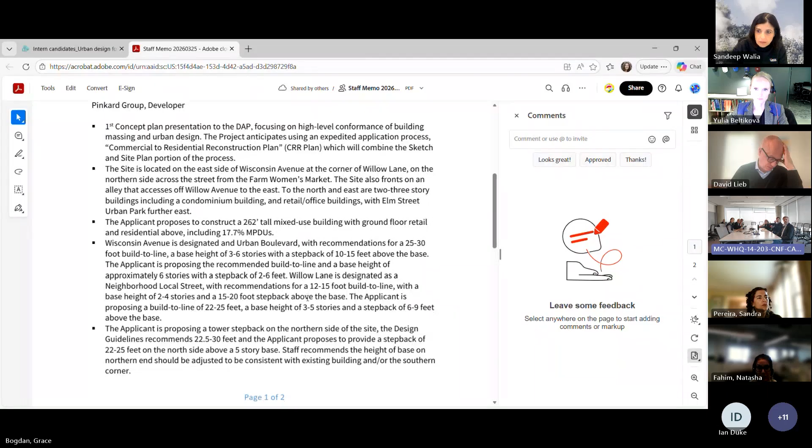And then the second page is really where we're getting into some comments. The massing concentrates its building height towards Wisconsin Avenue, with the tower in the middle, and then transitions down to Elm Street Urban Park. We do appreciate the breakdown of scale, but the proposed articulation seems a bit more rigid, and maybe softening that would be helpful. Then in the third bullet point, the large projecting set of balconies towards the southwestern corner is heavy. It creates an interesting corner treatment, but it sort of looms this primary mass over the smaller scale Farm Women's Market.

The fourth one is really getting into the base and how it could better express itself towards the relationship to the Farm Women's Market. There was a precedent photo in the upper right hand of page A-28 that we thought was really representative of what the project was trying to achieve and could be helpful to relook at. And then there's a general comment about the proposed vehicular and loading access off Willow Lane. I think this is similar to a comment you're likely going to have, if not already received in the DRC comments, about reworking the access off of the rear alley.

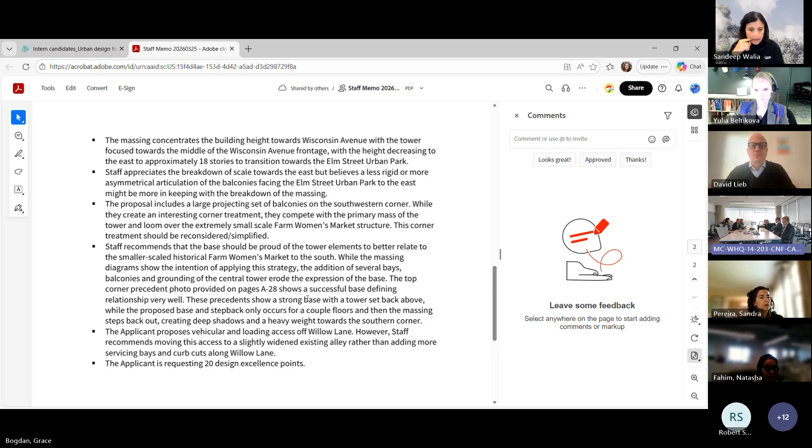Sorry for not having this. No, that's okay, we should. Okay, well, should we just jump in then? Yeah, okay, yeah, all right, Yavuz, can you share your screen?

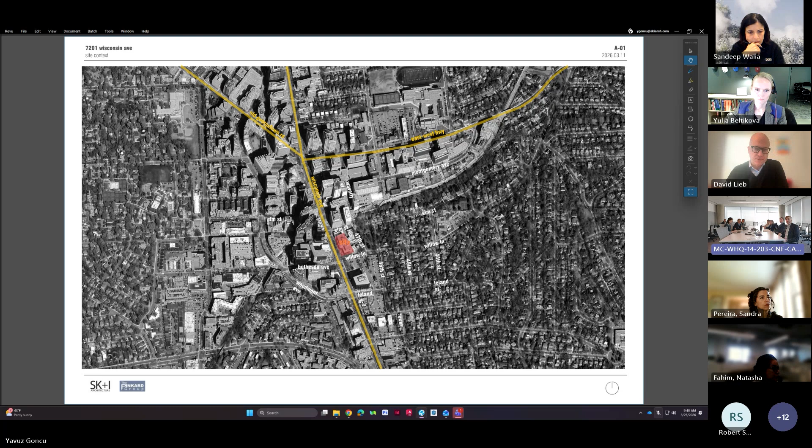Next page, so we're located at 7201 Wisconsin. Hi everybody, Chris Hopper, SK+I. Good to see you again. Joined online by Sami Kirkdill and Yavuz Goncu, who are also working on this project. The site is on Wisconsin between Elm Street and Willow Street. It fronts only on Willow and Wisconsin. So basically it's at that intersection where Bethesda Avenue kind of curls around, intersects with Wisconsin Avenue, and then Willow continues one way into the neighborhoods to the east. Next.

Current images of the site. So our site doesn't take up the whole block. It does stop right here at the existing bank building. So it's basically the entire pinkish red office building at the corner where the Panera is.

Can you go back one? Yeah, for a second. On the bottom right, you can kind of see the existing garage entrance and the existing alley access point there. That was our major comment for our DRC yesterday, where we discussed the site access there. I'll get into that a little bit shortly. Next page.

Willow is considered a neighborhood local street. Wisconsin, an urban boulevard. According to the guidelines, the site is also cited for as a retail node as well. So you can see we're currently proposing retail at the corner and potentially some more flex retail up the middle of the site. That's kind of TBD based on market conditions. Next slide.

The site is zoned CR5, C5, R4.75, 250 feet. We are going through the CRR program. We are going to provide 17.7% MPDU, so we can take advantage of the additional height allowed per that designation. So the overall max height for the site will be 262 feet.

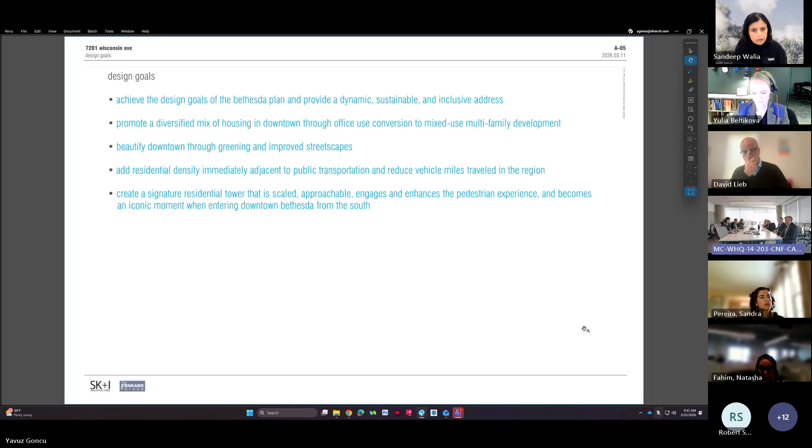Next. As I mentioned, Wisconsin is an urban boulevard. Its recommendations for a build-to line are 25 to 30 feet, with a setback between the 3rd and 6th floor. As you can see here, we are bringing up portions of the ground floor to the recommended build-to line and setting back other areas a little bit farther to address some of our public open space requirements.

This gives us an overall build-to line for the building between 25 and roughly 30 feet. This allows us to create that large planting zone adjacent to the street, but also an extra wide pedestrian through zone, and then provide an ample frontage zone that varies up and down the block here. Next.

Willow Lane, a neighborhood local street, has recommended build-to lines between 12 and 15 feet, with a setback between 2 and 4 stories. I think this is where staff has probably most of his comments, but we can talk through our thought process on the massing and setback.

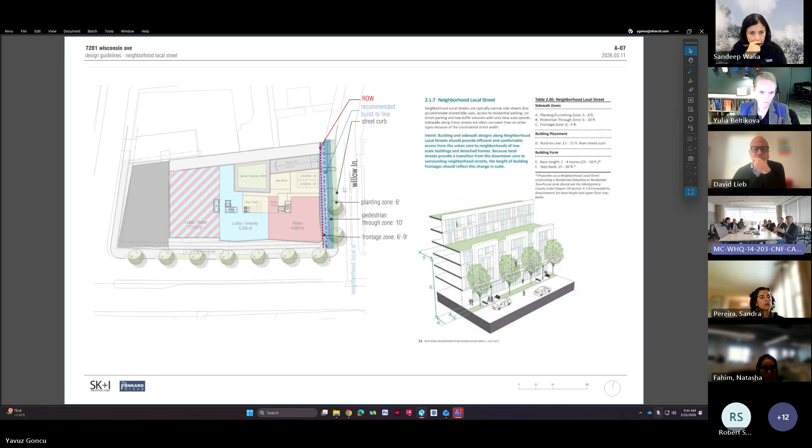Go back one page. Because Willow Lane's right-of-way is actually wider than where the current property line is, also deeper than the recommended build-to line, you can see as we go through we end up being set back almost between 22 and 25 feet because of where the right-of-way is, which exceeds the recommendation of the local street build-to line.

But what this does is help us achieve a couple things. One, Willow Street is also designated as a canopy corridor. While we are trying to reuse the garage and the existing office building, the foundation walls which extend basically to our property line, setting the building back and having a larger frontage zone and extra wide pedestrian through zone allows us to hit a couple of those goals of the canopy corridor by providing ample sidewalk width, and helps reduce the massing adjacent to the street by setting the building back farther than what is recommended.

We're further studying where the existing garage is to see if there's the possibility of trees, but we're not relying on having enough depth in the structure to do that. We are proposing additional planting in that frontage zone to create a double layer of greenery along this area.

Are you proposing street trees on Willow or not? There will be street trees, but there wouldn't be a second row of trees. Yeah, so it's a canopy corridor, and wherever possible, we try to do it.

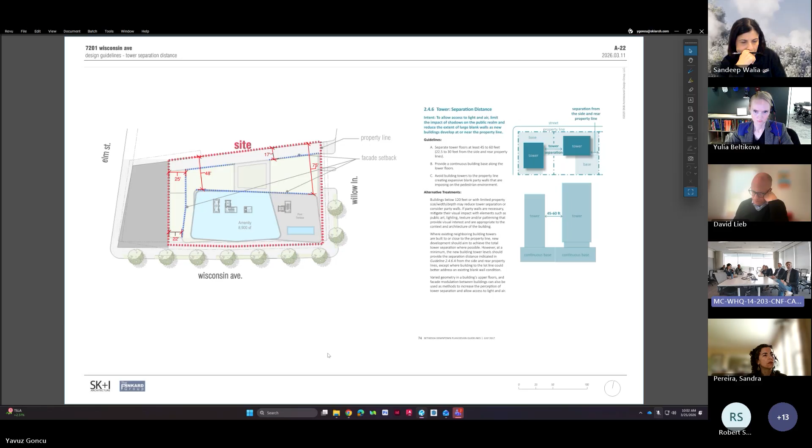Our goal with the step backs was to create a series of setbacks that are cohesive but create integrated, interesting architecture that's not just a simple wedding cake step back. Between the recommended build-to lines, all the buildings set back from those points, creating a natural step back at the ground floor that extends through the building, with overhangs and articulation. On both Willow and Wisconsin, there are multiple setbacks creating the base, the top, and the depth and articulation that lessens the bulk of the building.

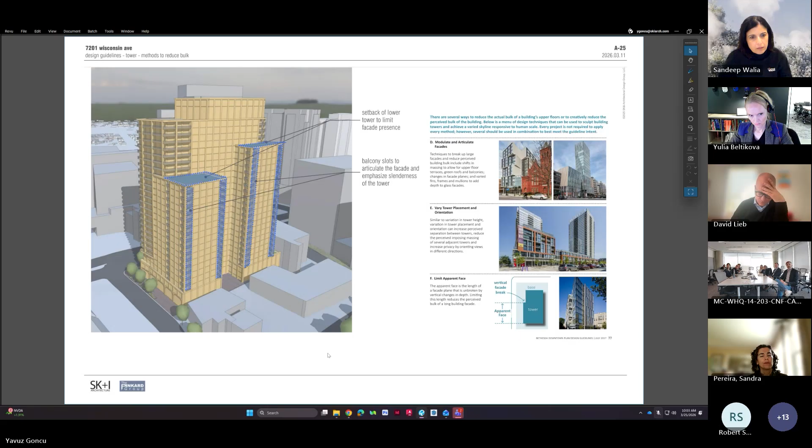As I mentioned, our goal was to move the full express height from the corner to the mid block. We're looking at integrating penthouse mechanical screening into that height to finish off and give that top proportion to the building, but also help skinny up the overall massing of the building.

I had a question about this view - Chris, could you roughly locate where the actual Farm Women's Market building is, since it's not on the street? It's quite a ways back. It's right here - there's actually space at that corner, not a building. I think that's important to point out. I believe the Women's Market is about 60 to 80 feet set back from there.

And not just on Willow, but on Wisconsin too, it's set back there as well. So I think that's helpful to point out for the DAP - that it's not holding the corner, so to speak. It's set back, and we're setting back farther than recommended, so I don't think we're towering over the existing structure. There's ample distance between the two, plus it's on our southern side, so we won't be casting shadows on it.

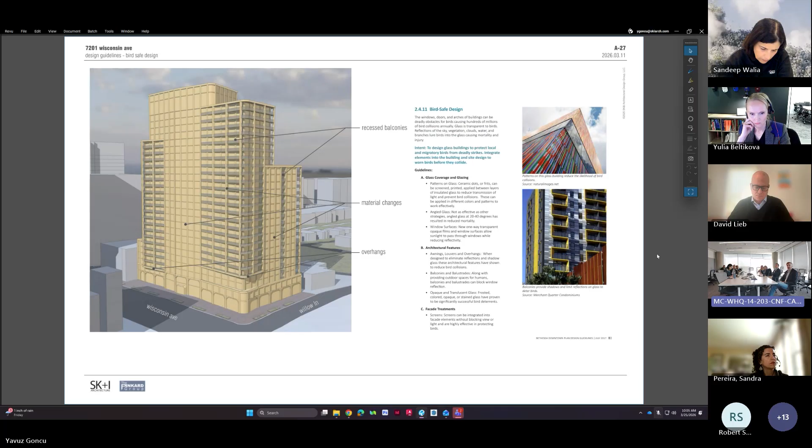We're obviously cognizant of all the bird-safe design elements we'll need to provide. A lot of the depth and articulation with the balconies, overhangs, and setbacks will create opportunities for shadows and material changes that help create that distortion on the building.

And the balconies, maybe. Yeah, and some balcony.

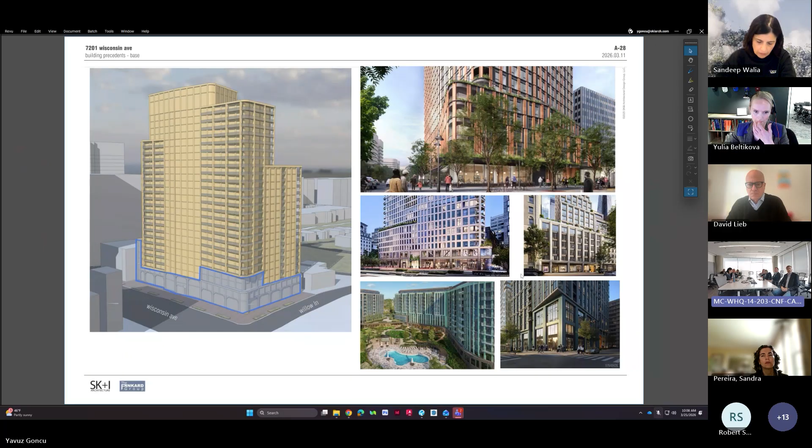And again, looking at simple ways where the massing and the moves create the visual interest of the balconies and the corner elements here, just by recessing, extending, but using that same language that's drawn through the building.

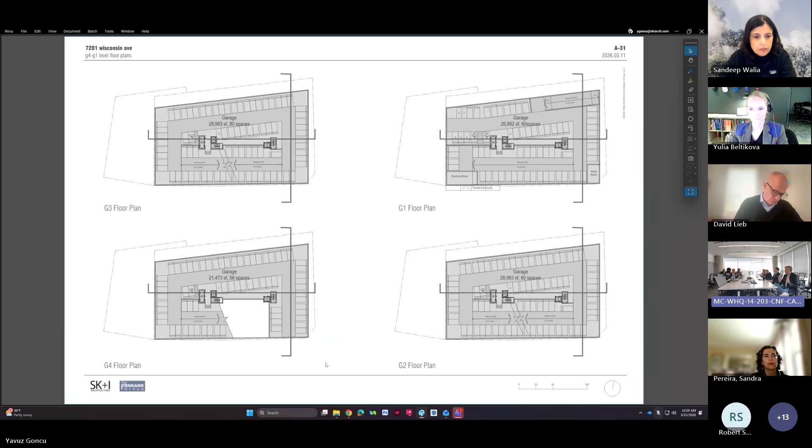I do want to do a quick time check, so you guys- I was gonna say, we don't need to look at the parking. We have the plans if there's any questions on the plans and setbacks and sections, but let's finish this up and open it up to questions and comments. Yeah, that's it. That's it. I have- can you go back to the massing diagram? Okay. Pages? Yep.

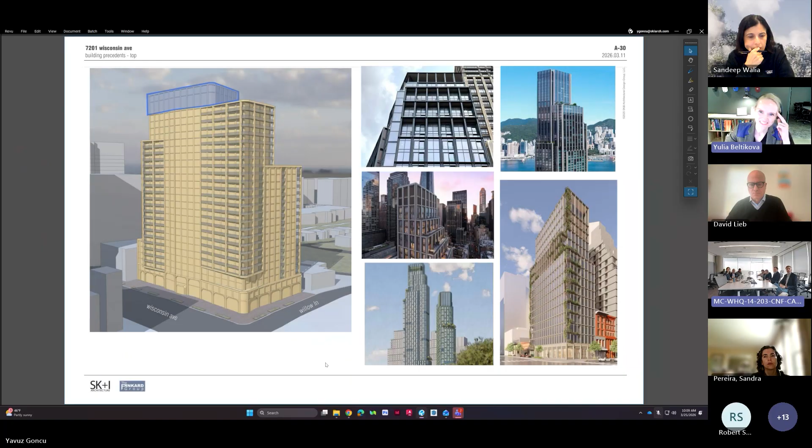Well, so I'll jump on. I think the general gist of pushing the density to the north is the right move. The thing that I'm missing, massing wise, is that I think the back is more successful than the front. One of the reasons for that is that everything's just so tight on the front. And I understand the challenges of density and all of that. I'm wondering if there's a way to either, I would personally be up for pushing the tall volume all the way to the north. I'm not sure you need the north setback.

Could you go to a view from the north, please? What's your colleague's name, Chris? Yavuz? Yavuz, here, yeah. Do you have any street views from the north? There, there. Is that it? Okay, yeah. Yeah, I'm just, it's the south.

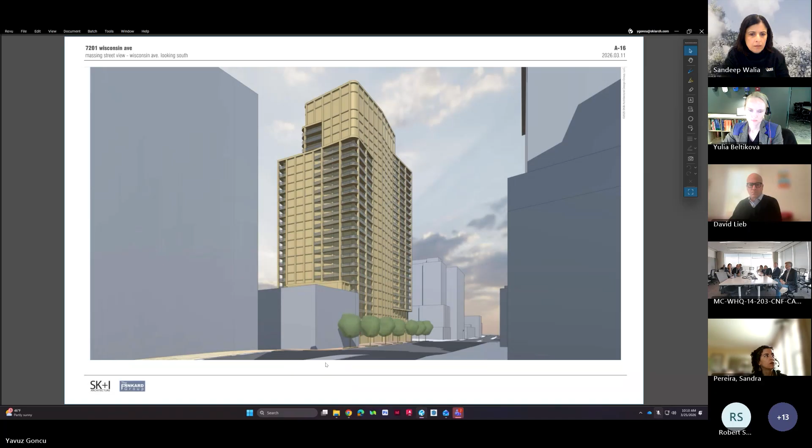I want to keep the tallest form off the street a little bit more and highlight the shoulders more strongly. Especially from the south, this is fine. I think it's the central massing and the lack of any depth between the shouldering and the main volume that's kind of my biggest issue with the massing to the south, to the farmer's market - either getting bigger step backs between the south shoulder or eliminating the south shoulder and bringing the lower shoulder around to the front.

If you go back to the south view - yeah, you sort of want the lower volume to be the corner, not the middle volume, if you know what I mean. This wants to be the defining volume from the south, if possible. And I'd even be willing to push that further north and have that be the defining element. That's kind of my first reaction to it.

Massing wise, see what the other DAP members think. Everything is just a little bit too flat along the street in terms of setbacks for me. But the approach of pushing the density to the north, keeping it a little bit more off the street if you can, that seems good.

I think I was worried about the neighborhood perspective, but I think that's actually working pretty well. I think it's the cantilevering of that volume, the floating of it, and the need to have the lower volume hold the corner versus the middle volume. I'll call it middle - I know there's like 1, 2, 3, 4, 5 volumes - but the one that either has to come down, or the south one would want to come across. Gotcha. It's my first reaction to it.

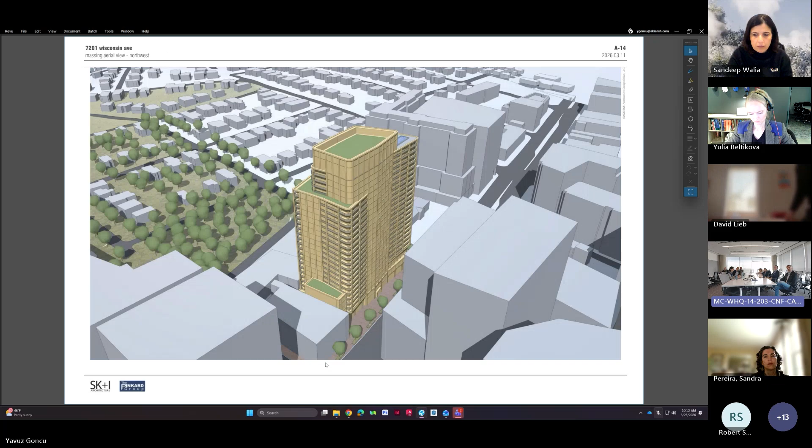Those two are quite equal in weight. The main volume and the southwest volume are kind of fighting with each other, personally. Either a greater setback between them along the street, or push the central mass inward more. I'm just thinking the southwest volume is kind of too tall for the corner.

So you're saying this volume here? And I would push this volume. I'd be up for pushing it all the way to the north, and letting this guy hold the corner.

Possible. If you can get more of a distinction between these, either a break or a fold or a reveal, that would also help in breaking up the mass along Wisconsin.

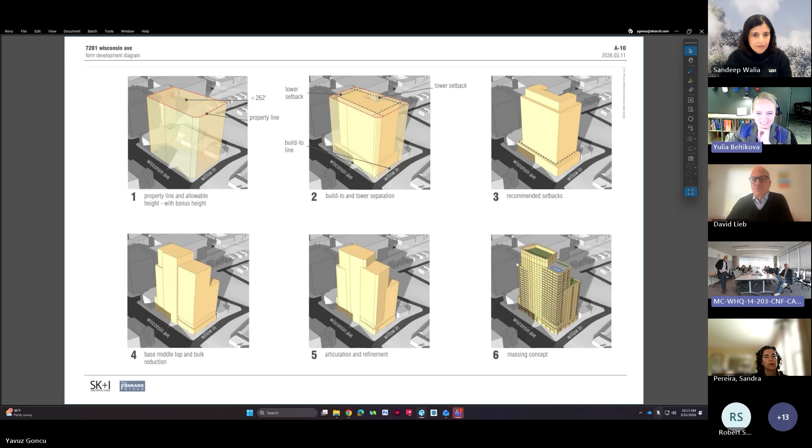We're just looking at the relationship of the different volumes that they're proposing. I think the general approach is the right instinct, basically pushing the mass to the north. That's the right move because it allows you to step to the south. And so now, for me, it's just the defining of the southwest corner.

There's the central volume and the first shoulder, let's call the tall one A and the next one B. A and B are kind of fighting each other and nobody's winning. So either volume C, the south volume, could come around and hold the corner, and this gets pushed in, or you push that back to get more distinction between those two. That's my first reaction. Yes, I agree with Robert's reaction.

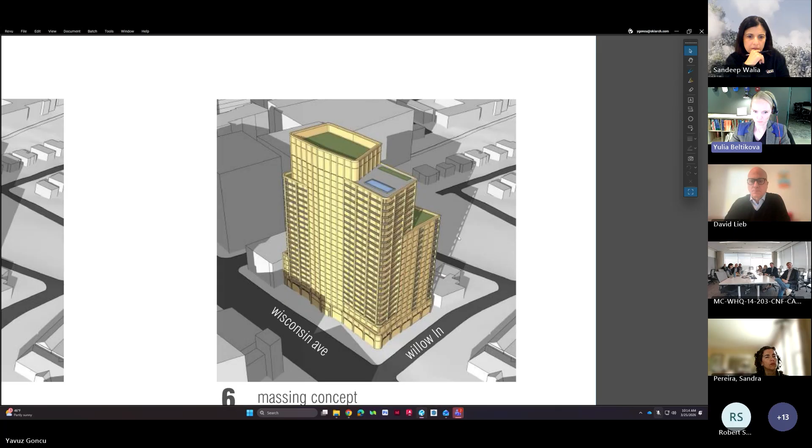I do not see right now in the proposed massings the distinct base, middle, and top. Perhaps it's the rendering. I can see it a little better on page A15, the street view at the corner of Willow and Wisconsin. I can see, because of the overhang, the 2-story base, or the first story base plus the recess.

I would also suggest, in your precedent images, some of the facades are ganged up between 2 or 3-story volumes, which you're not showing right now, but those precedent images are quite useful and will be useful when you further detail the building. When you combine 2 or 3 stories into one window or frame, it makes it less of a giant building looming over, at least visually.

I do believe you need a bit of a setback from Willow Lane. When you pointed it out in dimensions, I think you said that volume closest to the alley is about 9 feet setback, right? So at the farthest, at the north end, on the right side of this image, the part that goes almost 17 stories, that is effectively 9 feet setback from the recommended build-to line.

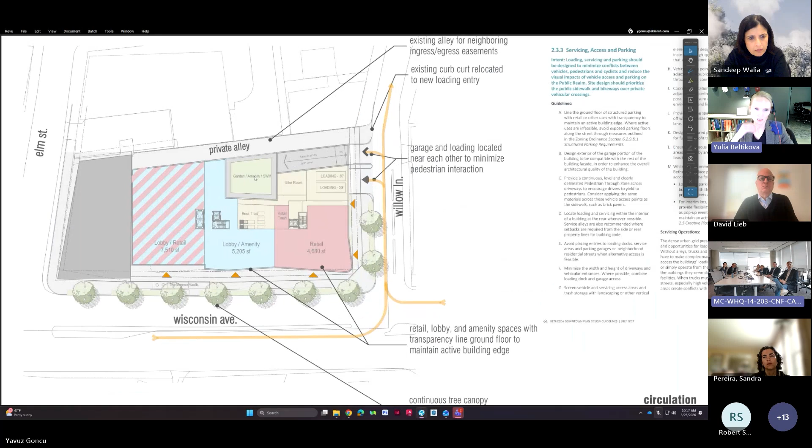That would be a private area that would either work with and capture a lot of our stormwater management requirements at ground level, but also maybe an area accessed off the amenity space as an outdoor garden area. The alley could probably have a private screen between the alley and this space to make it feel more welcome, but with the opportunity now of moving loading back here and needing to look at the structure with the garage, that may just disappear or get shifted.

I mean, in terms of the massing, that size is what's extruded with the fingers in the massing. So I actually like this idea.

Because there's an alley, I wonder if there's an opportunity to do something to the alley and make that park semi-private. There are areas in Bethesda closer to the metro where you're walking through neighborhoods and there are semi-private parks that you can walk into, sit on a bench, and they don't completely get closed off with gates, but there is an indication that this is not completely open to the public, yet very inviting, calm resting spaces with trees and plants and benches.

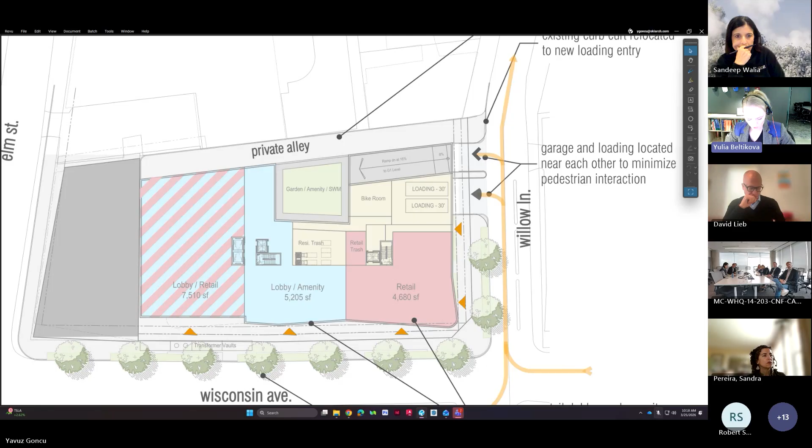Going back to the setback, because you're using the existing garage structure, I'm realizing the further you set back this face on Willow Lane of the building up above, that load needs to carry through to the existing garage. So you also have a limitation on how far back you can practically set it back, because otherwise you're losing a lot of existing garage spaces.

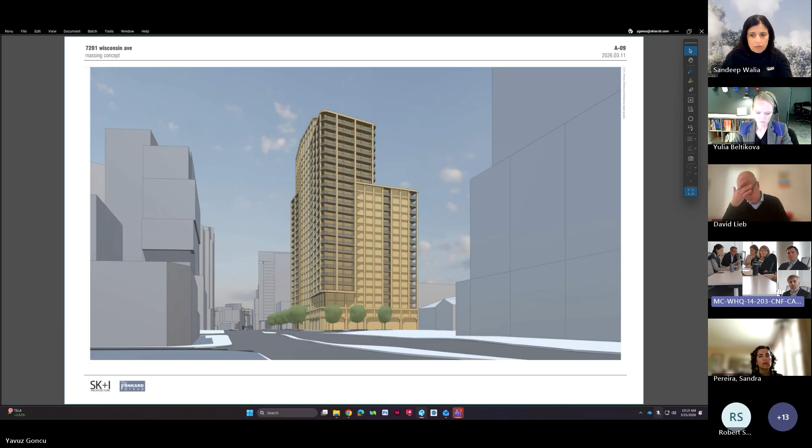And probably it's going to be in the drive aisle at that point. That's partially why, as I mentioned earlier, we're getting scans of where those walls are this week to confirm everything, but we have some old drawings we've been referencing. And yes, to your point, where those setbacks are, they're catching columns right before the drive aisle. I think we have a little bit of wiggle room to massage where that setback is, but there are structural limitations, like you said, to what makes sense to build with those setbacks.

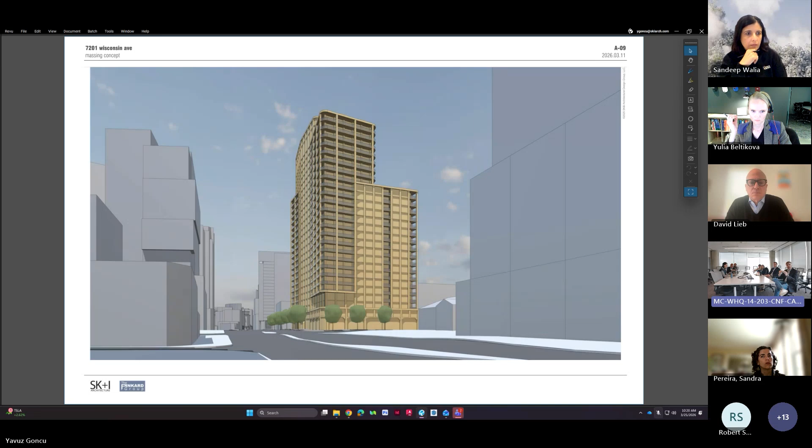So maybe there's a way to further articulate that two-story base in this view a little more, to give a larger apparent setback from where the actual tower is, and that would help. I think the tower itself is mathematically in the right spot for the recommendations, and probably structurally with the garage. So if we can express the base in a deeper manner, maybe pull it out a little farther, since we're pulling it back as you go on Willow Lane, maybe it stays a little closer to the street edge instead of pulling back. It'll help create a larger apparent setback there.

The building overall is large, but the building across the street is quite large as well — a lot of new high-rise buildings coming online along the Wisconsin corridor. And there is some breathing room, that little park on the corner, 7200 Wisconsin, right across the street — the Starbucks park that is quite successful — that's not going away. It's public use space for 7200, so you're correct, it's not going away.

So you're saying there's a big development that's not shown here, happening catty-corner? How tall is it? 250. You should show it. We can show it — you worked on it, so I can. It just, in terms of our views here, it kind of gets in the way of some of those aerials, so we just hid it. But that's the point, it helps you. Yeah, I think it helps you. We can throw that in there.

I don't know how this works — we can make comments about pure design, and then there is reality. There's the practicality of constructing something, which we've already discussed, the existing garage structure, but there's also pro forma to make something feasible in these very difficult economic conditions. I don't know how many units you would lose — will it render the project infeasible if you're setting back another, say, 5 feet and losing the depth of units, and therefore the overall number of units is less?

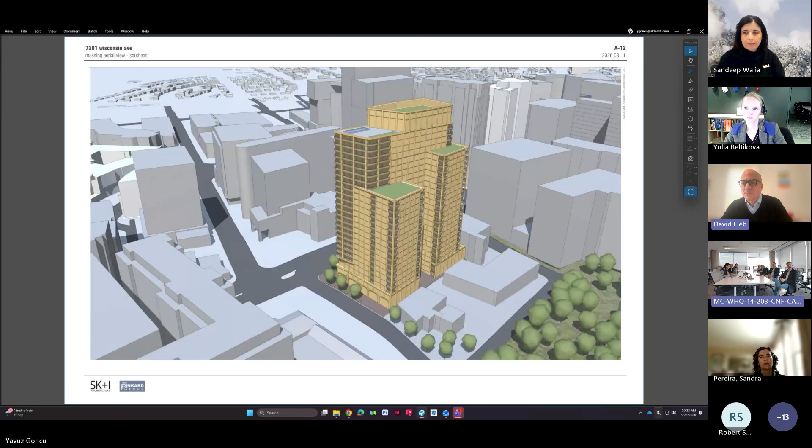Why don't we let others offer their ideas? David, do you want to offer your opinions? I do, but Sandeep just raised her hand, so why don't I let her go first? It's okay, David, go ahead. I just wanted to make sure there was some time for me to speak.

Oh sure, thanks so much. And I have to jump off at 10:30, so I appreciate you letting me jump in here. I thought I strongly agreed with a lot of the comments in the staff report and Rob's comments also.

When I looked at this, I had a sense that there was insufficient variation in the facade, or there's some undulation to it, these hinges that you describe, but they're almost too subtle to read in a lot of ways.

And I was wondering, could you go to slide A18 please? Yeah. So there are a couple of things about this that I wanted to note.

You made reference in your presentation to there being a simple treatment of the facade, by which I hope you mean there will not be a great deal of material variation, that consistent with some of the images you showed, there will be a consistent facade treatment. One thing I would very much not like to see is that middle tower volume being sort of one of those glass eruptions between a couple of different building forms that seems common, and kind of leads to a very incohesive looking building.

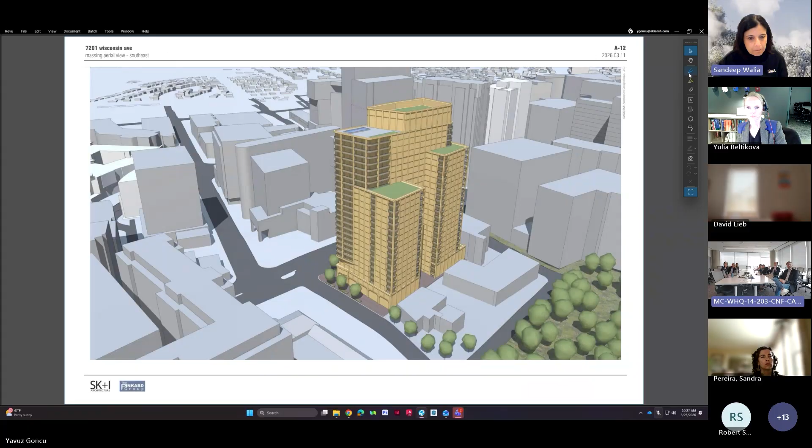Quick question before I say anything—just to confirm, I think I tried to make sure I understand, but the Starbucks Park, since we called it that, is that staying or is that going to be changing? Yes, that's staying. I think you're referring to the old Starbucks that was across the street, where the Jose is. There's a building missing on the southwest corner of the slide, but the open space is staying, right? It's staying, the recently revamped open space is staying. Yeah, that area is staying.

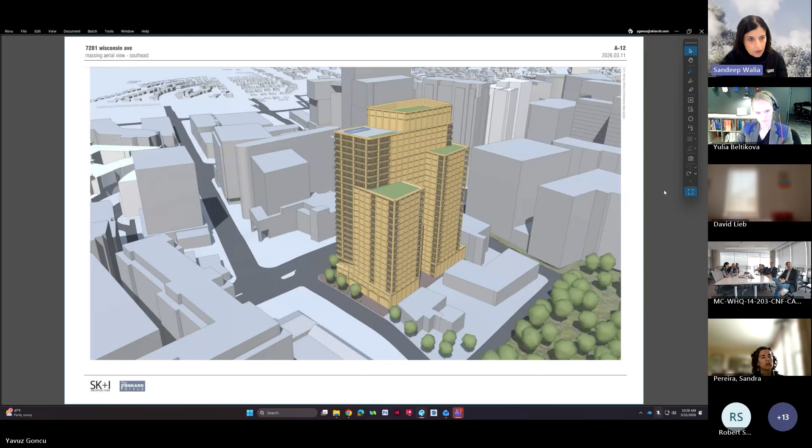All right, so I agree with everything mentioned in the staff report and what my colleagues just mentioned. Just adding a little overlay of landscape related comments here. As I look at the existing conditions, what I see we kind of missed is there is a major corner treatment at the intersection of Wisconsin and Willow Lane. So that is something that isn't there anymore.

And when I look at the overall connectivity of the site with the existing space that's across the street on Wisconsin, that existing corner that is there right now seems to have a really good seating area, some art element as well.

And then there's dedicated bike lanes over there as well, which take you back to the park. So there is sort of this environment of pedestrian connectivity and the idea of coming to a space with some sort of art element.

I really liked Yulia's comment about the garden that is proposed around the alley, and if that space at the corner is going away, I appreciate all the additional setback that's been provided. Obviously we'd like to see what the landscape architect envisions those spaces to be, but how are we going to compensate for that loss of the corner and what the community is used to utilizing that corner for? So there seems to be a potential to integrate the garden space by the alley, and perhaps look at the treatment of the entire alley, understanding the loading and unloading requirements, timing, what time the main usage is going to be.

Is there an aspect of connectivity between the corner, the alley, and what happens at that amenity space? And then further how it extends itself to the park. So what I'm looking to see is if you zoom out a little bit, how does all of that fabric work, what's your team's attitude to it? And how does the design start to represent that attitude on the ground plane?

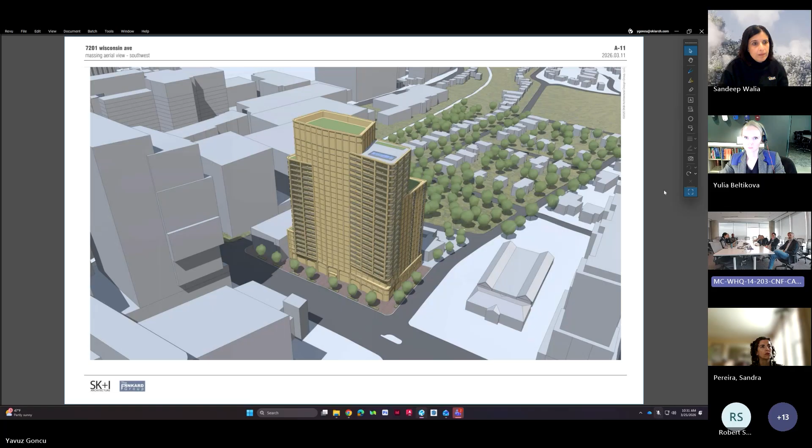That's all. Say about the alley, the property owners that have access to it are located to the east. They use it very much for operational purposes, so it's a little grim back there. And we are only controlling one side of it.

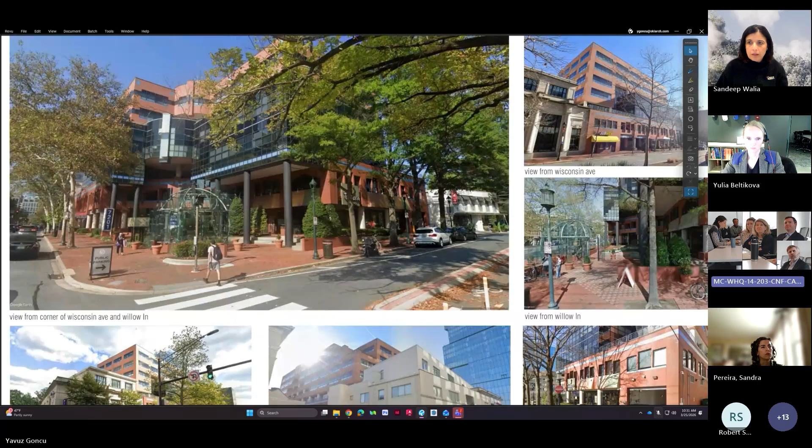If you can get that loading in the alley, it would be great, even if it was just one at a time. If you don't widen it and ruin your whole structural grid, that'd be great, you'd get a lot of points for that. I mean, I think we're committed to doing that. So we just had to make sure the garage entry still works structurally, right, with all the parking layouts.

So we just got to see, because that may need to go in as well and rotate. We haven't gone that far yet. So I think knowing exactly where those extents of the garage are - we have a good sense, but if we're going to widen this 5 feet, there's also then the ask of needing a pedestrian refuge between here, and that pushes it another 5 feet. So effectively, we'd be pushing it 10 feet almost.

I just wonder if you have to widen it - why can't you just keep it and then widen it beyond? Recommendations are the minimum is 20 feet from the DPS. Yeah, but then we have to look at the truck turning. Well, I think some of it is either put it actually on the street or accept our offer, right? So I think we could run it with the civil engineer, run some truck turning movements in here.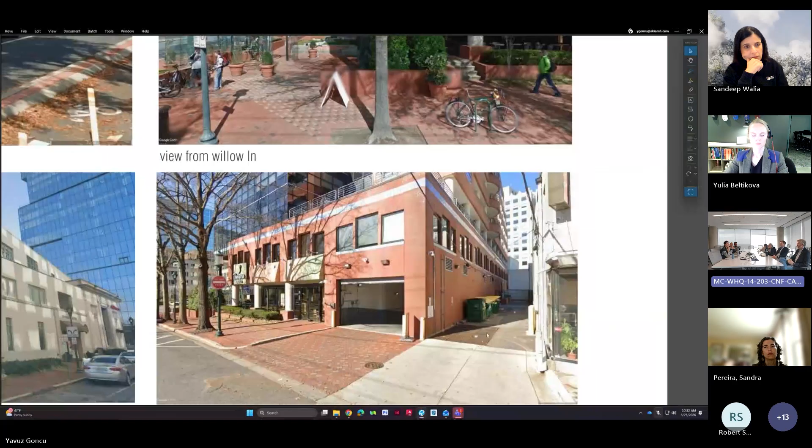I just don't know if 17 feet is going to allow us to turn in, turn out. No, you'd widen beyond a certain throat, I think. Oh, you're just saying open it up. Yeah. So I think we need to explore options and see how it works. It's just something we discussed yesterday.

I think it'll be really great if you can look at some of the points you heard, both for the landscape and the architecture, like the proposed buildings across Wisconsin and also south of the Farm Women's Market. Really look at the Farm Women's Market and its plaza as an outdoor room. There are going to be 3 new buildings that will shape that outdoor room, and maybe that gives you some cues on how the massing of this building needs to participate in that conversation.

Totally agree. I think seeing it in isolation is one thing, but once you start to see what the building to the south is doing, what's happening at that corner to the southwest, how is that building doing - it changes things.

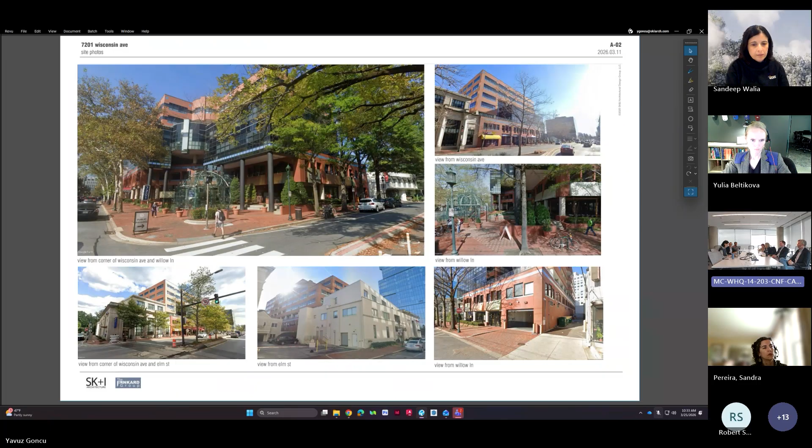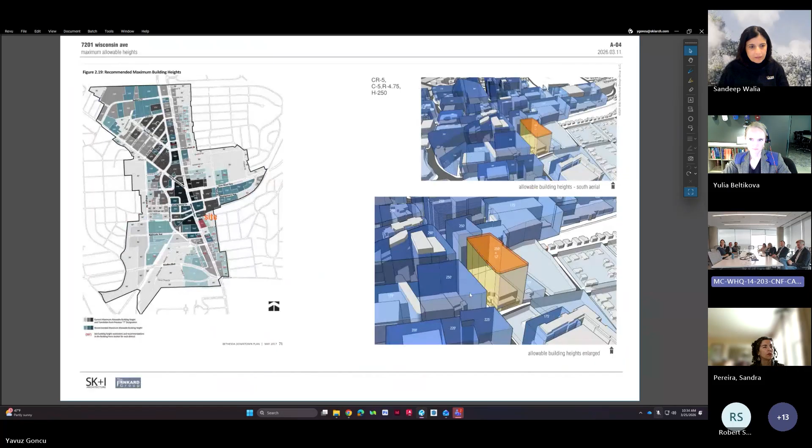So when you say that the alley is going to be widened, does that mean the entire building and both those forms going down, everything's going to get pushed? Potentially, yes. I would rather get the variance on the alley width, put more step backs on the front than setting.

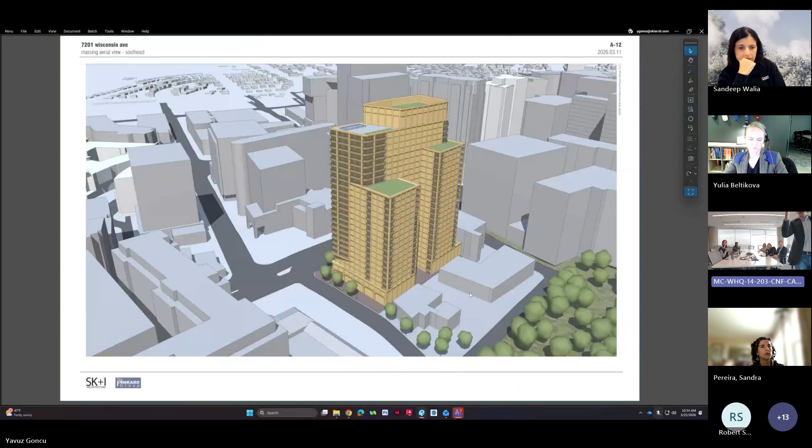Well, so kind of continuing what you were saying - we have discussed your idea of bringing the side around to the front, even if just internally, even if you just shove it back. So this is the plane that defines the corner, you're seeing this. Push it back a little scooch, push it back a little bit.

That one view on page 18 is the key view of the massing. It just shows the two fighting forms, Chris - the tall tower and the south - they're kind of both fighting for attention. It's like too many kids calling for attention and there's no harmony. So you diminish one and you win.

I think the north, pushing the mass to the north is a stronger move and it'll be just fine. You'll pick up the density you lose, and then you get a more harmonious top, middle, volume stepping - they're kind of fighting right now. Without losing density, I think you can recapture it, hold the line to the north, unless you're worried about firewalls or fire setbacks or something. And then diminish this southwest corner because it's kind of fighting for attention right now with the central tower.

Part of it is the way that's rendered, I think. When I look at that, sometimes I see the corner jutting out further, but when I squint at it, I see it differently. No, I know what you mean. I'm not trying to be difficult.

Like the president's comment - we're not going to have solid wings in a glass tower. I think that's wonderful, your kind of difficult mass approach is good, where things are coming off the same volume and the same fabric. That's all good, and it's very economical. So right now, those two things are fine.

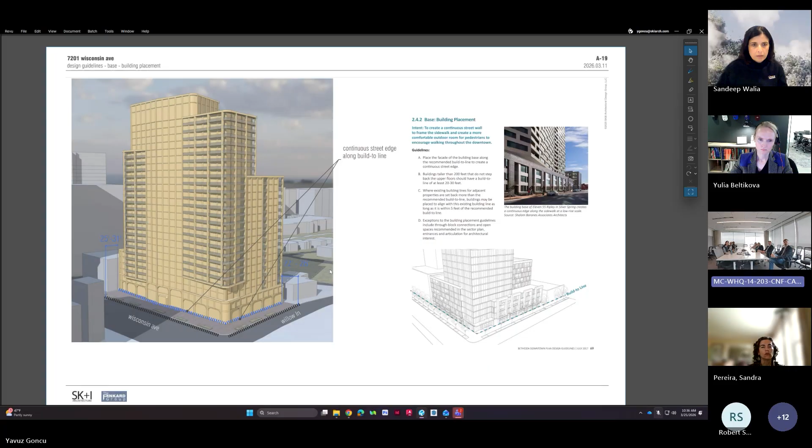I think the comment is heard, and I hear you. But I also think some of it is, once there's glazing and rendering, I think we're trying to accomplish the same things - it doesn't read as well here because of the lack of materiality yet. We have looked at it, and that is the idea of softening it, bringing that setback. So I think if there's other ways we can do that - let's just ask Yulia and Sandeep if they agree that sacrificing some of the north setbacks would be worth it to get better setbacks on the south. Yes, I agree.

No, there's no leading these two. I know these two, there's no leading. Yeah, I hear you, anyway, just a thought.

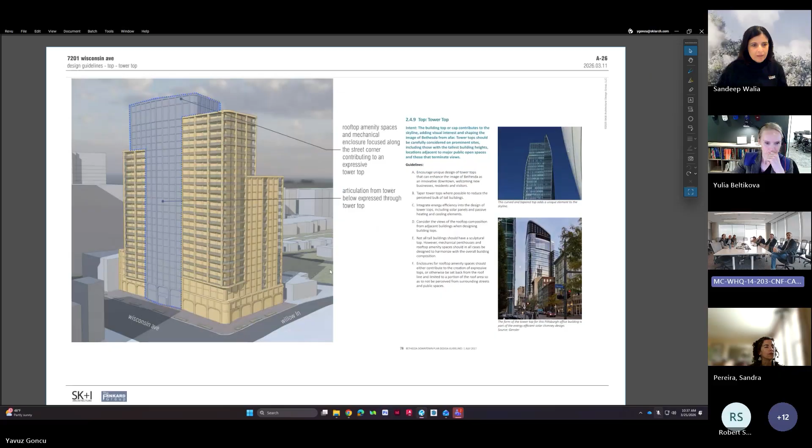No, the neighborhood side is surprisingly successful - we have, it's really important, we did a lot of some jiggering. Yeah, that's working pretty well, but even there, you look at that - again, call it volume B - push it off the street a little more and you're kind of there.

Anyway, what you described, we have scheduled already, we've looked at it, and it wasn't unsuccessful, but we just haven't gotten to the next level with the architect. I think the density, we're comfortable with what you're saying, as long as it structurally makes sense with where this garage ends up and the setbacks.

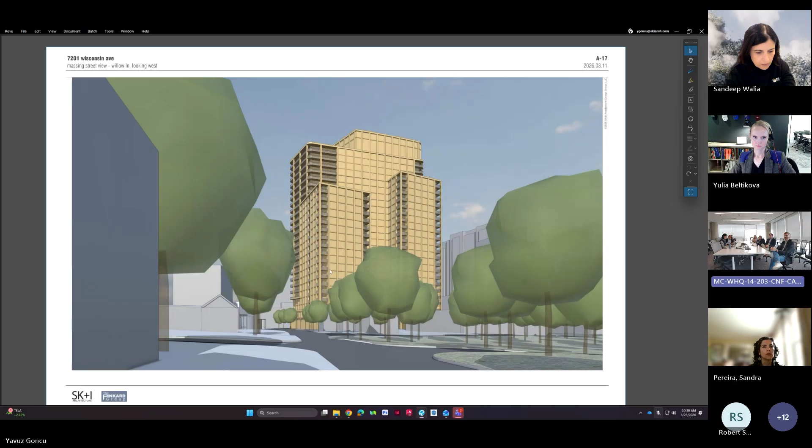The garage is gonna need a lot of surgery, obviously. It was built for a 7-story structure, not a 27 - well, not a 6. So you get a little bit because it was office, but not enough, as long as we're not underpinning. There are some incredible jumping jacks to do to get that additional step back, but I think there are ways to do that.

I was worried about the capacity of the footings, since we're keeping only the foundation walls. But can the footings carry this weight? We did a quick study on that, and we get like 3 more stories on this site with the existing footings, and that's about it.

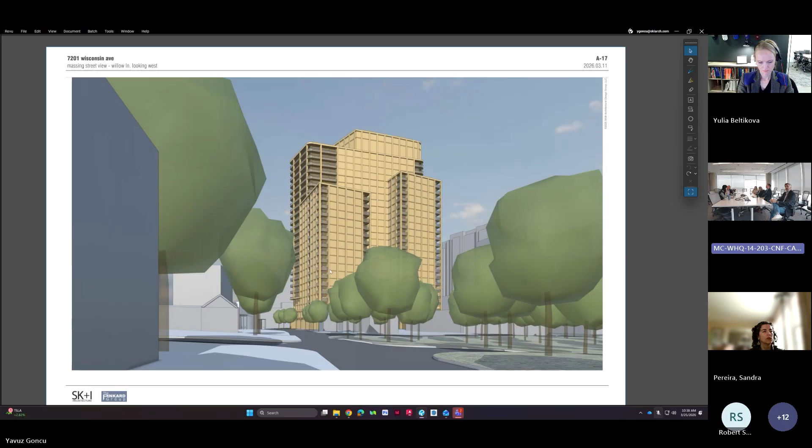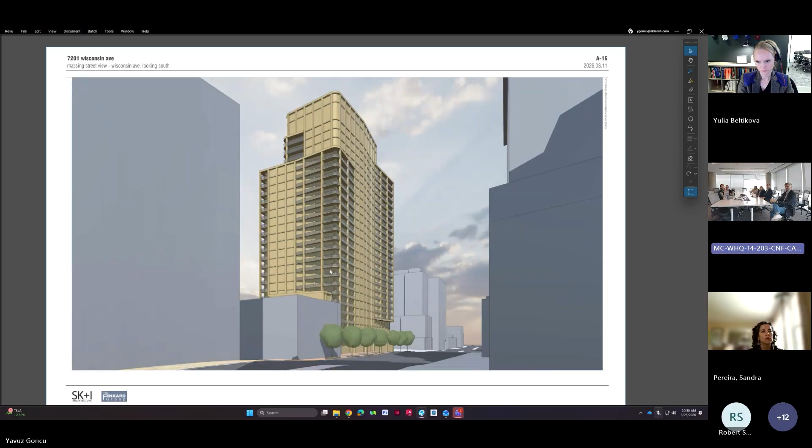Well, anyway, I applaud the first move, which was pushing the density to the north. These moves on this side are good. We just need to lessen the impact at the south corner a little bit. Show your neighbor, because I think that changes everything once you see it - show all of the existing and proposed.

So we're almost 10 minutes over. I think the big question here is, does the panel want to see this again, addressing some of the massing comments, before we move to the next phase of CRR/site plan? If there's time, it'd be nice. I mean, it can be an email too, we don't want to hold things up, we know how difficult things are.

You could email it around. What do you think, Yulia? I think, since you guys are trying to do expedited, email is fine and we can comment - you're nearly there. The only hesitation I have about email is being able to wrangle the comments. I think sometimes when we have the comments in the room, it's easier.

Can we do a virtual Teams call? Yeah, we can find that, we could do it early. It's fine, I'd rather us all be aligned. Go to their office, whatever, submit whatever - we've done that, that's fine. Oh, we go there? Yeah. I don't know, I'm volunteering, it's not that - your space, but that'd be great. Come on in, Tommy would love it.

Okay then, we keep pushing for - Chris, one more quick question. What is the little nub on the north? What is that little guy doing? That was a question from Paul, who wasn't able to make it today. What is it doing for you - is that curiosity? Because I think I just solved the density issue, if you're willing to give that up.

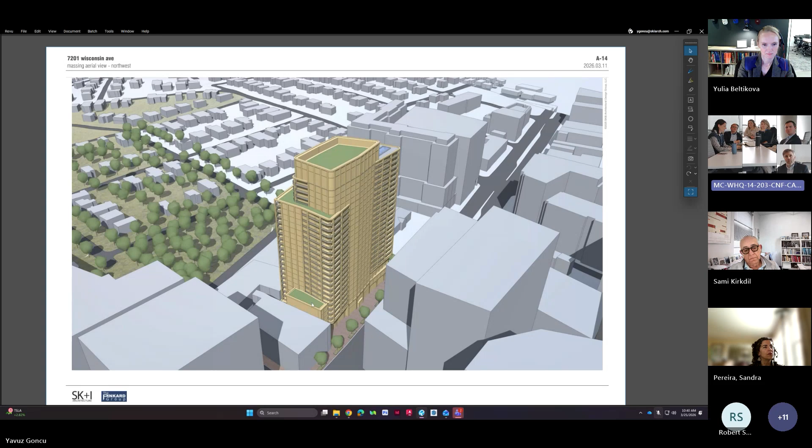I think what we could do here, for your question, is eliminate this one. This goes right up next to our property, so we have to set back 10 feet - recommendations are 22.5 feet.

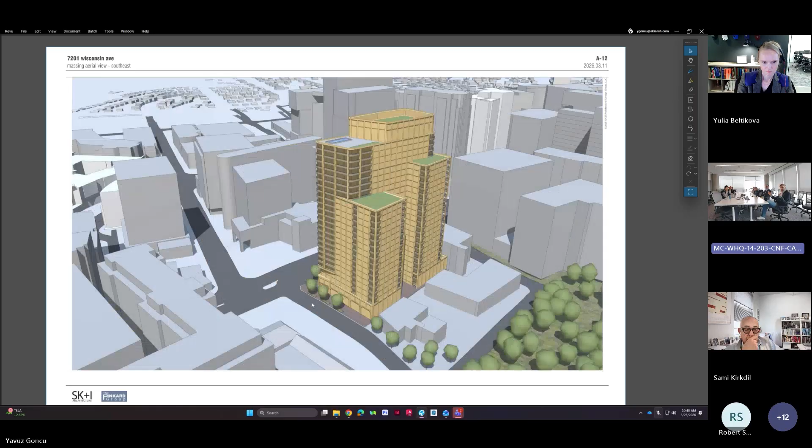You want a good south corner? Let me ask a question - given the dimension of that, how wide is that thing? 60 feet. No, the little nub - the setback over the nub, how big is that? I'm calling it volume E, I guess.

I thought it was close to - it looks like about 20 feet wide. Oh, no, it's 22 to 25, by 60 deep. Sorry, how wide is this? That's 25? Well, it's 22 at the front, 25 in the back. And that's a fire code thing.

Can I ask another question? You don't need 10 feet for fire code. Recognizing that bank building is not historic, if we were to do it, we would like 15 - that gives us the opportunity to have flex. Yeah, you get 45% at 10. You don't need more than that, well, it depends - residential. That's what the skin's looking like, right? But the general recommendation is 22 feet for tower separation.

So if you are all - I mean, is that bank gonna get a setback in this case? That's what I was gonna say - it's not historic, but practically, given the depth of that bank, you're never gonna have a tower there.

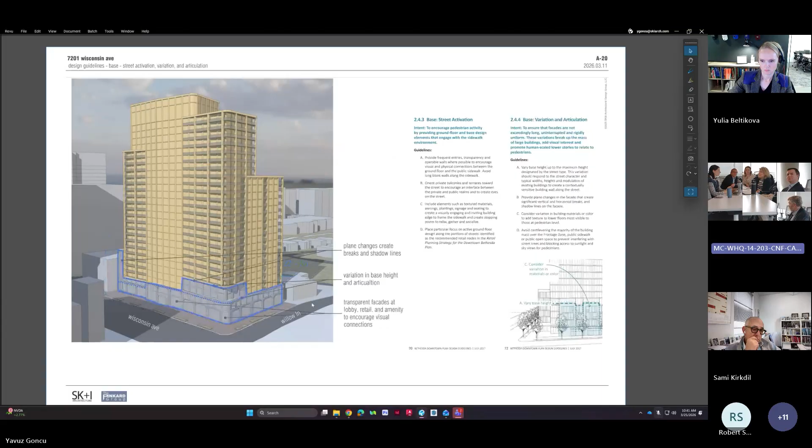So is there a need to look at how small that parcel is? I mean, we're not in New York, you guys. Is that going to get redeveloped, you think? Unlikely, on a postage stamp, not likely.

Not likely, they'd probably reserve their rights to do it later on. As long as the DAP staff is flexible, we could lessen that to 10 or 15 feet. We're just trying to hit the right balance. I'm not opposed to it. Well, it's okay with me. It's up to these folks.

I think there's a priority here on the south side that needs to be recognized. If we're making these adjustments, we'd really expect a strong response on the south end. It's going to make it easier for us structurally as well, because we'd be having to slope columns on those first two floors to get into the tower. If we can align everything, it makes it easier.

I don't think it's a huge risk for you. You gotta think about it, but I don't see a tower coming up on that postage stamp. It's just too small.

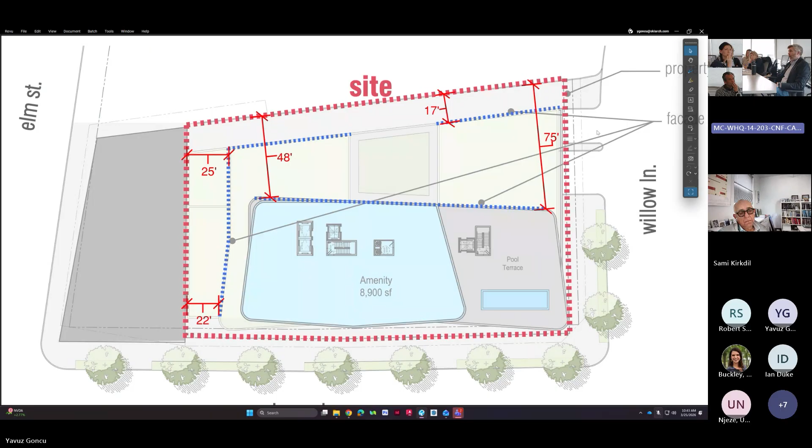Not even in New York. We did a quick study on it. Yeah, but that helps a lot. I would go north. I think he'd agree with you.

Okay, great, good, this was helpful. The other thing that's somewhat pertinent to the DAP: yesterday the county council approved the overlay zone ZTA, which officially brings the Bethesda overlay zone forward to the new public benefit structure.

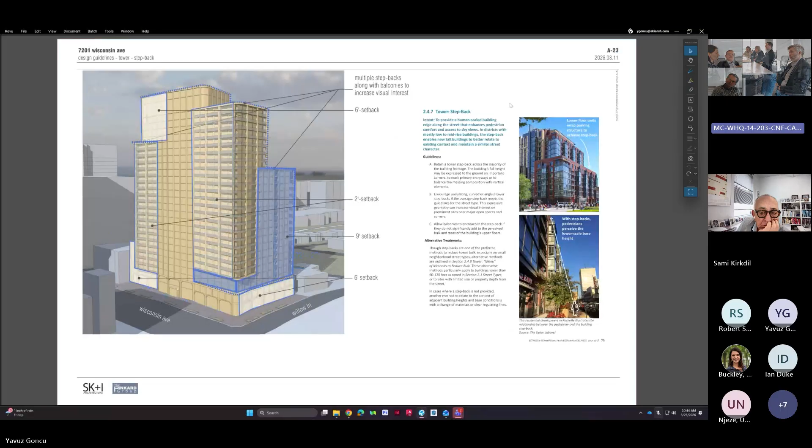So when you guys officially resubmit, you'll be able to use the new structure. This is why it's built into the larger DAP. Staff has been working on updating our public benefits to be more in line with county priorities in 2025. Atul and I have been working on it for many years. It was officially approved last year, but we still had to address the overlay zones such as Bethesda because they had tailored it in a certain way.

The new overlay zone's public benefit structure is based on tiers in terms of public benefit scoring and evaluation, whereas the old structure was based on public benefit points. What we did with the overlay zone ZTA was a really technical assignment of how public benefit points align with the tiers. So essentially, moving forward, projects will be requesting a tier 1, 2, 3, or 4 in design excellence, as opposed to 10, 20, or 30 design excellence points.

I was thinking about maybe doing an explainer or a quick refresher at the monthly meeting to explain the transition to you guys. That'd be really helpful.

I believe there's a one year grace period, so for this project we really have the option of opting in or staying in the current system. The new menu is a lot better.

I think it's easy to achieve, though I'm biased. Is it going to be easier to review and get good points? If we did our job correctly, I think a tier 2 would be equivalent to like a 15-20 point request either way. 20 points is probably tier 3, but we'd love to hear that.

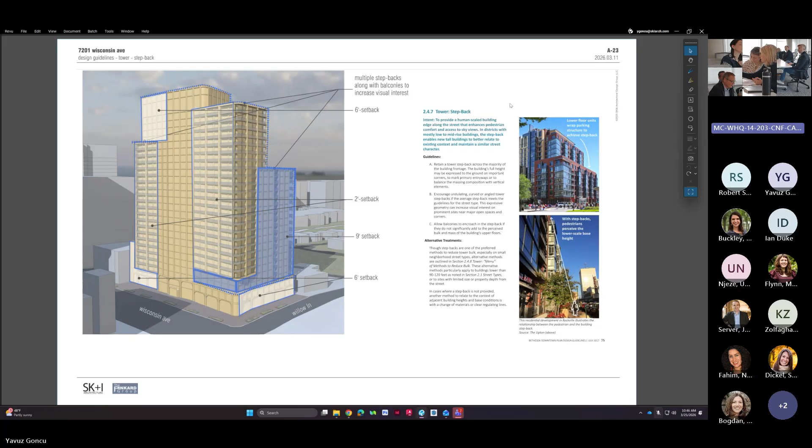But you have the option. I know some projects that are definitely going in under the new system. This one, I don't know that we've carefully evaluated it yet. Okay, great, very helpful, thank you so much. So exciting to see development, the CRR helping.